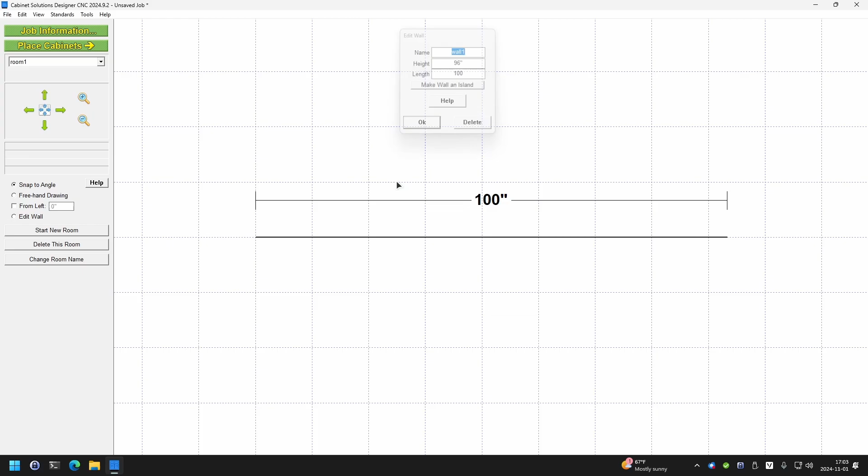So let's draw our wall, make it 100 inches, go to our place cabinet screen, and let's go ahead and place in some cabinets. I'm going to place a regular base cabinet, place in another regular base cabinet, which we'll be using for our knee space, and then placing in a drawer bank for the other side of this desk that we're creating.

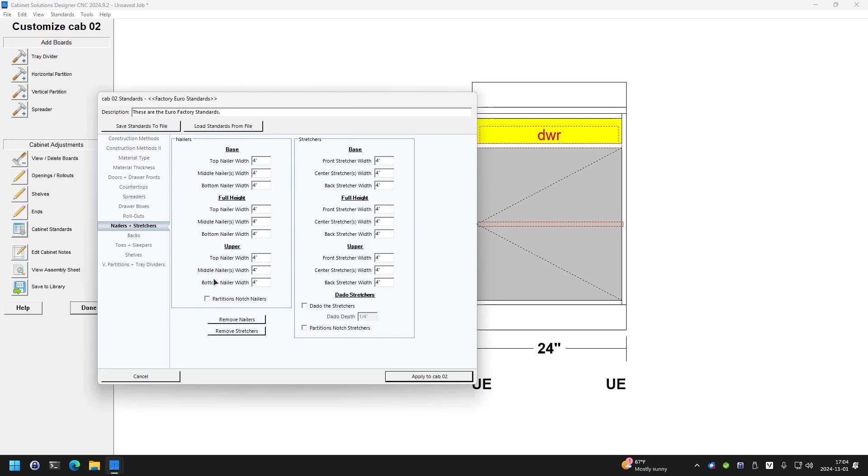Let's go to our elevation screen and click on this middle cabinet to customize it. From here, we're going to go to our cabinet standards and just remove the information that we don't want. So let's go to our nailers and stretchers. We're going to remove just our nailers. And let's go to our toes and sleepers and remove all. Then click on apply to cabinet number 2.

And now we just need to turn this into a single opening with a drawer box in it. So we're going to go to our view and delete boards, and just click on clear interior.

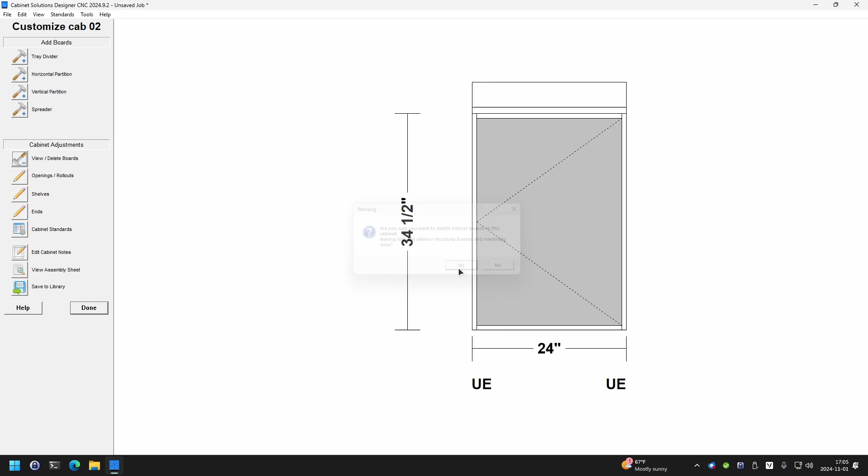Now we can change this opening to a giant drawer. Let's go to openings and rollouts. Click on the opening and change it to a drawer. Click on OK and OK again.

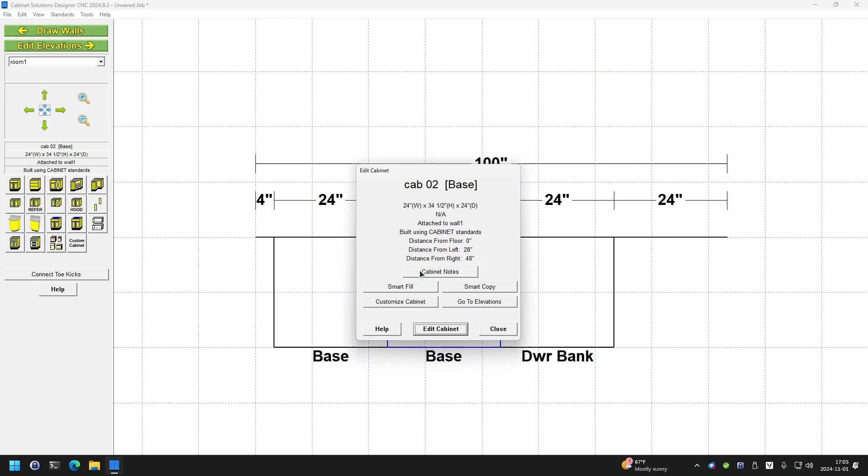Now we can go back to our place cabinet screen and just adjust the height of this plus the distance from the floor to bottom. So let's go to edit cabinet.

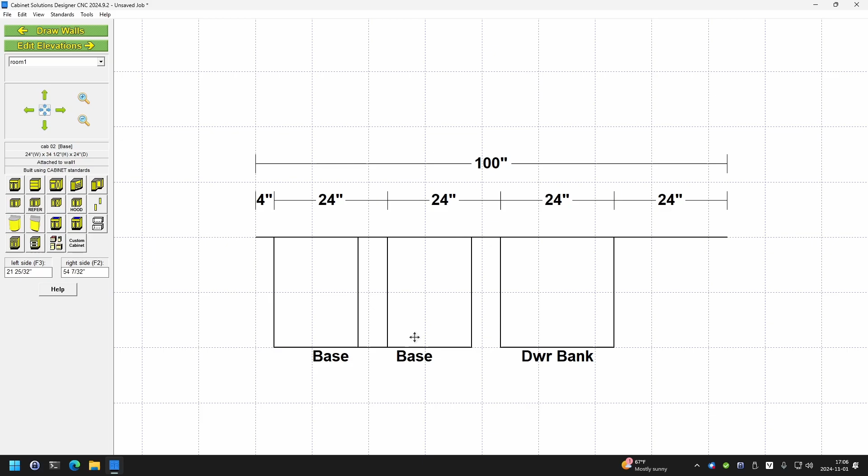We're going to adjust the height of the cabinet from 34.5 to, let's say, 5.5 inches. And the distance from the floor to bottom will be that 34.5 minus the 5.5, so that's going to be 29 inches. And if we did our math right, everything should be flush.

Again, this is Jake with Cabinet Solutions Designer Software. This is how you make a knee space cabinet with our software. If you have any questions or anything, please feel free to give us a call.